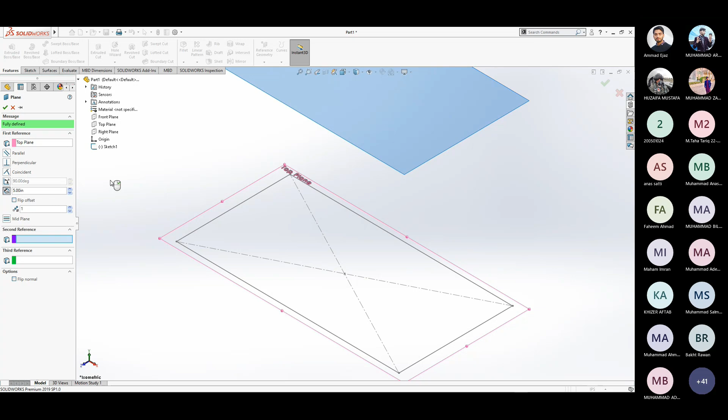With my cursor, you can see a mouse button with the right click arrow. You can select it or go to the left side and select OK. Now we have created two planes. To fit the geometry on your screen, just select zoom to fit.

Select the top plane, select the plane we just created, and start a new sketch. To make this plane parallel to our screen, go to the view orientation and select normal to. Create a new sketch. Let's say I want to go with a polygon of 6 sides. Select the center point and draw its radius. Now we have two geometries.

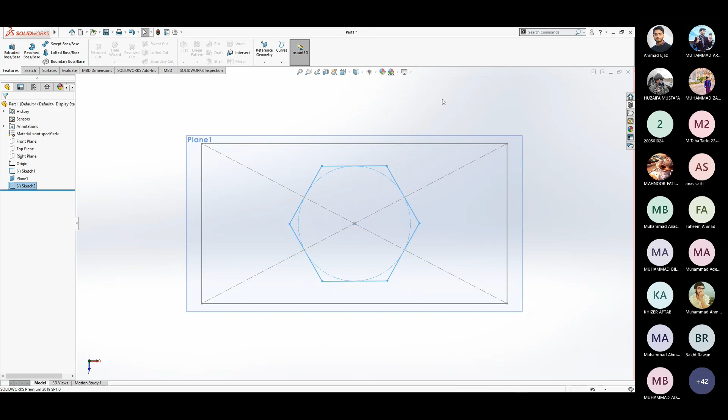Exit this sketch, go to the view orientations and select isometric view. Go to the boundary boss/base feature and select both geometries. We have selected one geometry and the second one. You can see we are creating the same feature just like lofted boss/base.

Now, the point to be noticed here: we got another point, which is a green point. This point is showing the direction of our geometry. This point of our rectangle will be merging with this point of our polygon. I want this point to be merging with this point. So just change this direction and the geometry will be updated respectively.

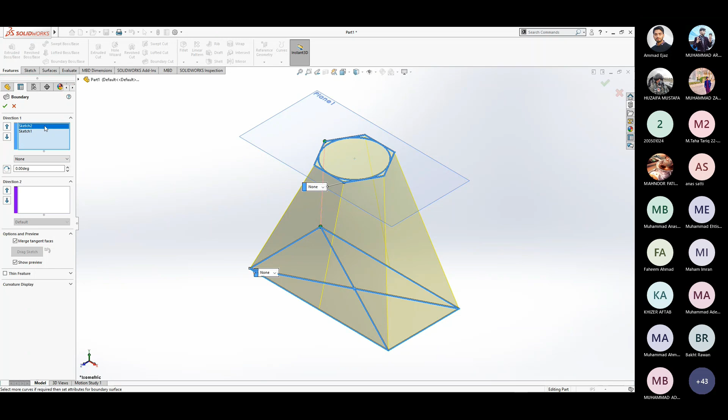Other than that, we have other features like we can make this feature tangent, direction vector, and other features. Let's select this feature. Selecting this feature, we have created the first plane normal to. We have created this geometry normal to our second sketch. To increase this sketch tangent length, we can increase this length or change its direction respectively.

These are some extra features that are not available in lofted boss/base. That was the key difference between both features. Coming to today's session, let's release this feature, or you can minimize it for later use. Go to the new file.

So far we have worked on part files. We have learned how to create sketches and how to convert these sketches into part files, into 3D objects. Now in this session we will be working on assembly files. What this assembly file icon means is you can merge more than one part to create an assembly. Just select this assembly and hit OK.

On starting assembly, you can see a pop-up on your screen. This pop-up is asking us to insert files. You can cancel it or insert the file you want. Let's cancel this, and let's visit the user interface of this assembly feature. On the top, you have the command bar, just like before in the part files.

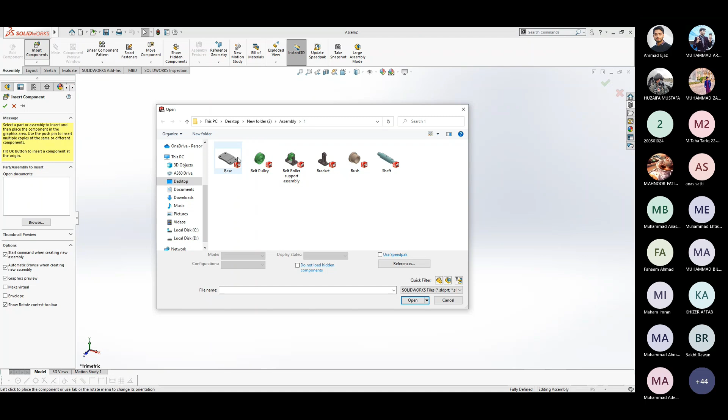Let's start the assembly. Let's click insert component. We have provided this file to you. If you go to the WhatsApp group, we have provided a zip file. If you extract it, we have two folders in it, 1 and 2. Let's go to the first folder and select base. Select the base and select open.

Now you can see my cursor is holding the object. If I want to fix this object on the plane, just select OK. Now we have successfully imported one component. If you go to the features, you can see all the hierarchy of the object is visible over here. If you want to edit some features of it, you can just click on it and edit part.

For editing this inside an assembly, you need to save it. Let's save it in your favorite directory. Let's call it assembly1. Now it's asking that your part file is an older version file. If you save it, it will not be able to be opened in the previous version. Let's go with save. Now you can see we are inside the editing feature.

We can change any sketch. We can change any features. This is just like a part file. You can see all the features on your drive. Let's exit this sketch. This is the edit component feature. Go to the view orientation and select isometric.

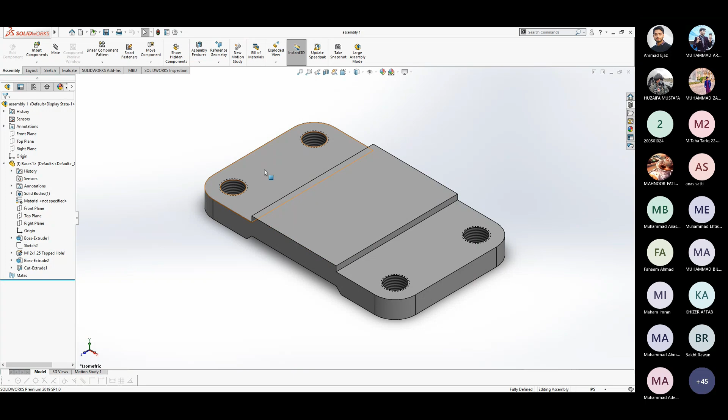Now we have one part, but we need other parts for the assembly. Go to insert components, and here you can see the preview of our other components. To make these icons bigger, just go to the right side and select large icons or extra large icons.

Now we have successfully imported this component, the base component. We want this second component, that is the bracket. Just select this component and hit open. You can see my cursor is holding the second component. Just click anywhere and the component will be imported over here.

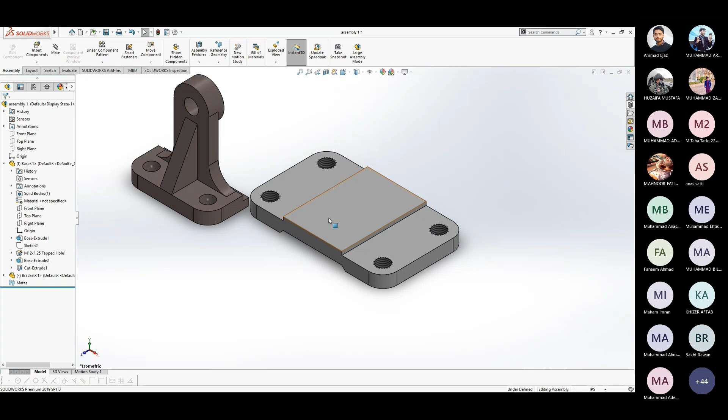Now this component is movable, but this component is fixed. When you are working in assembly, SolidWorks identifies the first component as the main component or the parent component and makes this component a fixed component. You can move this component by right-clicking and selecting float. As you can see, this component is floating right now, and you can move it. If you want to fix it, just right-click and then fix it.

Okay. We want this component to be sitting on this part over here. For that purpose, let's select this plane, this face, and rotate it, so you can see the bottom part of this second component. Select both components. As you can see, we have a pop-up over here. It is asking us to define some constraints.

Just like relations in sketches, we have mates in assemblies. The first one is called a coincident relation. Second is parallel, third is perpendicular, and the fourth is lock components. These are the primary mates, and the others are advanced features. You can also access this bar from this option. Just select mate and select the respective faces.

As you can see, our component is automatically dragged to this respective position. If you want to change its orientation, you can flip it from here. Currently, we don't need to flip it, so just select OK.

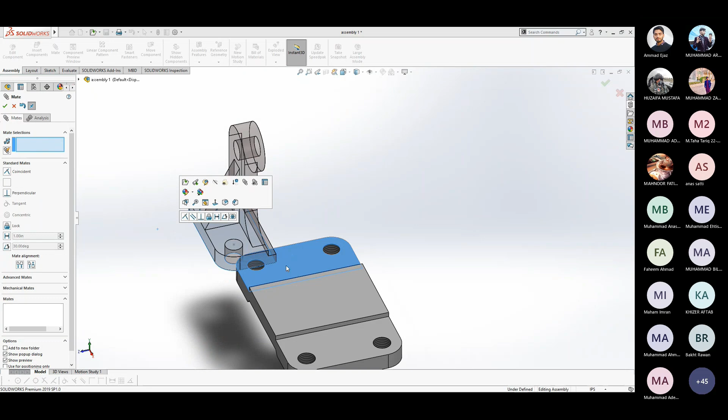Now we need to rotate this component about this plane. You can simply select this face and rotate it, so you can see this side of the bracket. Select both of these faces and select coincident. Now you can see it is making these components coincident. But what I want is this part of the bracket facing in this direction.

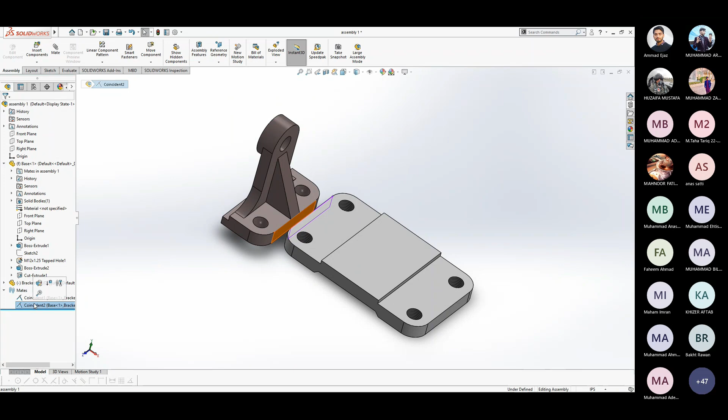For that purpose, go to the mates. In your feature manager, under your assembly file, you can see the mates that we have already created. The first one was coincident and the second was coincident. If you want to flip it, just go to edit feature and select mate alignment. Hit OK.

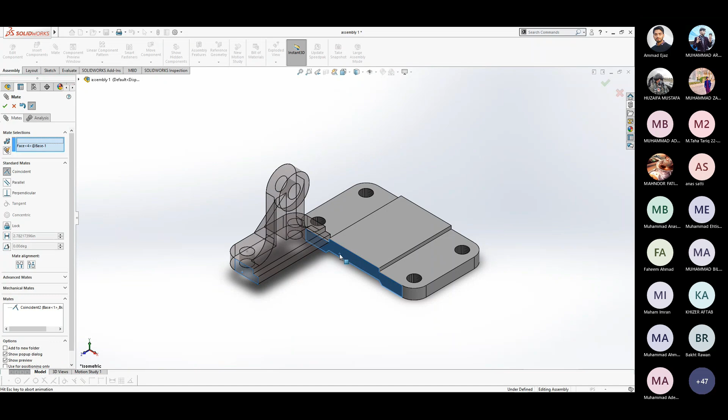Next, we want this face to be coincident with this face. Select the first face and then the second face. As you can see, both components are perfectly aligned with each other. Now we want this part to be mirrored over this side. We can copy this component and do the same steps again, but there's a smart feature for that called the mirror feature.

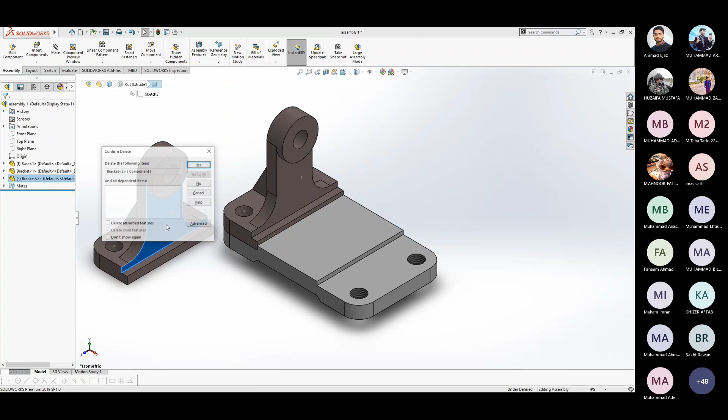In order to copy a component, you can select insert component and add another component. Other than that, you can just hold the control key on your keyboard and drag a component. You will get another copy of the component. For this operation, we are going to mirror this component. Just select the component, go to the linear component pattern, and in the drop down you can see mirror components.

For this mirror component, we have two primary options. It is asking for the mirror plane, the plane about which you want to mirror this object. As you can see, we can't select a plane right now because the view is occupied by the mirror components feature. For that purpose, go to the feature tree, select the drop down, and select the respective plane. For our assembly, it is the right plane.

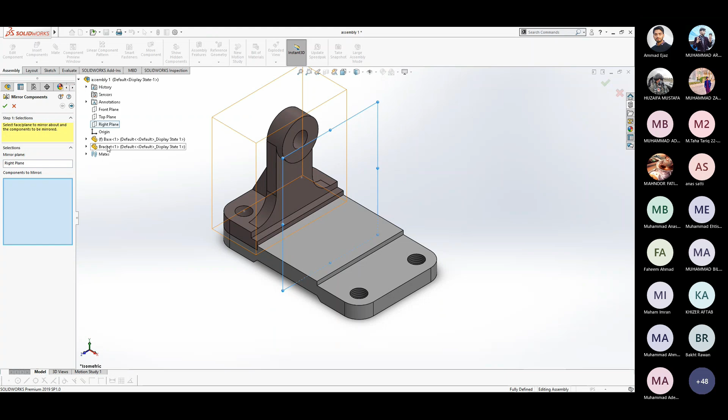Select the right plane, and now it's asking for the components to mirror. We have this component to mirror. Select the component, and go to the next. It is already showing a preview of how it will look after you mirror it. Hit OK, and you have another copy of the component.

As I described earlier, every feature in SolidWorks is a non-destructive process. If you add anything to this component, the same feature will be applied to the other. If I move this component, the movement will be applied to the respective other components.

Let's select insert component and insert our third component. For the third component, I want to select the shaft. Double click on the shaft and you will have your shaft in your assembly. Select anywhere on your screen.

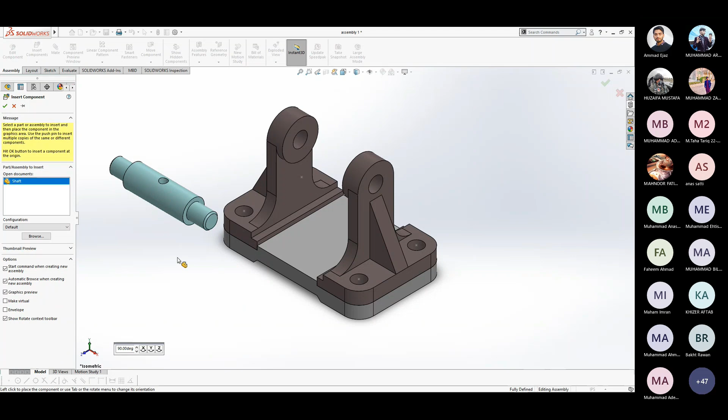Now, as you can see, we want this shaft to be inserted into these holes. For that purpose, just select the circumference of the shaft and the circumference of the hole. By selecting these two faces, you can see we have a pop-up of mates. For this operation, we want concentric. What's concentric? Concentric will combine two circles and make their center points coincident. Select it, and your part will fly to the respective position.

Now, as you can see, all other components are fully defined. Only this component is underdefined. This component can't move anywhere else, but it is free to move in this direction. To make this component fixed on this bracket, we need to apply another mate. This mate is called width mate. What will this width mate do? For better visualization, go to the front plane.

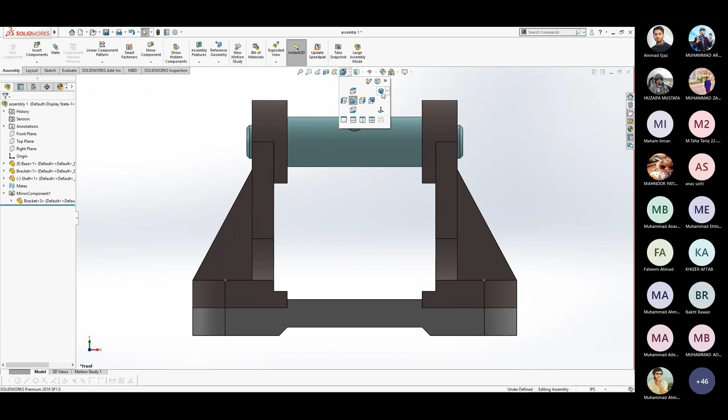We want this pin to be equally distanced from both sides. For that purpose, go to the isometric view. Drag this component outside of the assembly file. Now, select the respective component. For this operation, select the first face, hold down your control key, and select the second face. Rotate it, select the third face, and similarly select the fourth face. When you have selected four faces, SolidWorks automatically detects that you are trying to apply a width mate. Just select the width mate, and SolidWorks will do the rest of the job for you.

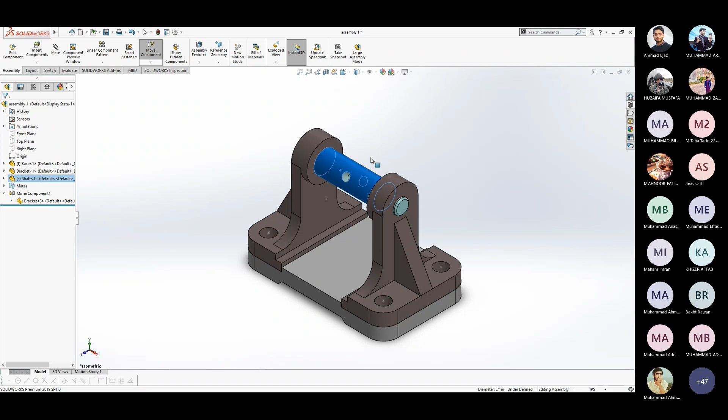Go to the isometric view. Now we have created this assembly. This assembly is complete except for one component. As you can see, this pin is able to rotate along the axis. We want to insert another component. Just go to insert components and select pulley. Here you have your pulley with your cursor. Now we want this pulley to be concentric with this pin. Similarly, select the inner face and select the outer face.

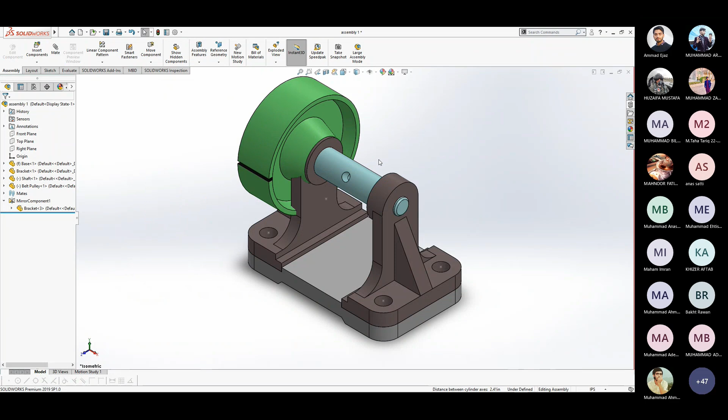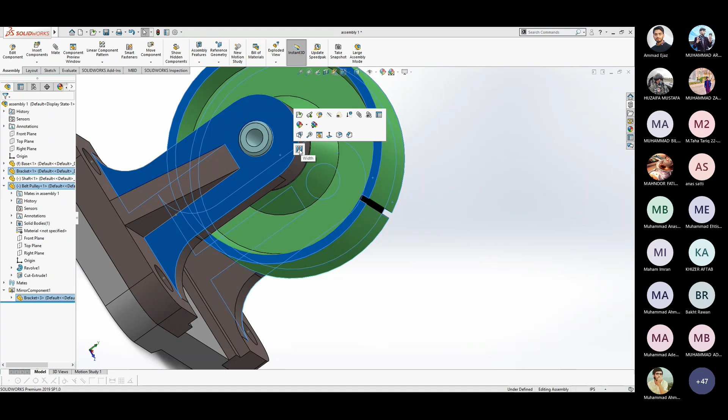Select the coincident relation. As you can see, our pulley is coincident with the pin, but just like with the pin, we want this pulley to be in the center of these faces. For that purpose, we can select another feature that is called symmetrical. Select your part. When you look into the part, you can see different faces. You can also use the width feature for this operation. Select the first face, second face, similarly rotate it, and select the third face and fourth face. You can see we have width selection with your cursor. Select it, and we have our pulley fixed in position.

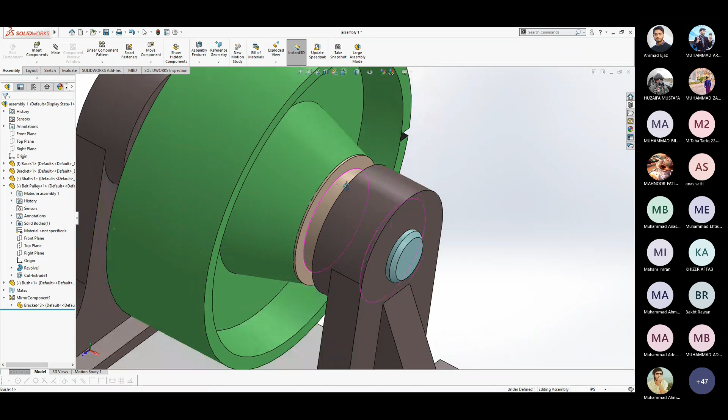We have created our assembly. We just need to insert one component over here. Select insert component and select bushes. Here are the bushes. To insert this bushing along the pin, we select the outer face of the bushing and the face of the pulley. We have a coincident relation over here. Now we want this face to be in line with this face. Just select both faces, and we have suggestions of parallel, perpendicular, or coincident. For this operation we want the coincident relation. Just select this.

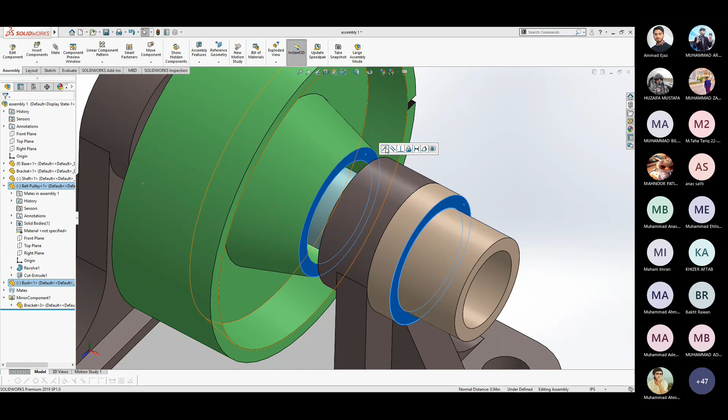We also need this bushing on the other side. We can go to mirror components. But since we already have a mirror, for the sake of simplicity of our feature manager, you can edit this feature. Just select edit feature, and under components to mirror, select the bushing. If you go next, you can see we have our bushing on the other side. This is our assembly completed. I guess it's a part for furniture.

If you want to insert general components like bolts, nuts, bearings, or gears, you don't need to draw these components on your own. We have the toolbox provided with SolidWorks. This toolbox includes all the most commonly used components. If you want the inch system, you can select inches. Currently, we are working in the metric system, so select ANSI metric.

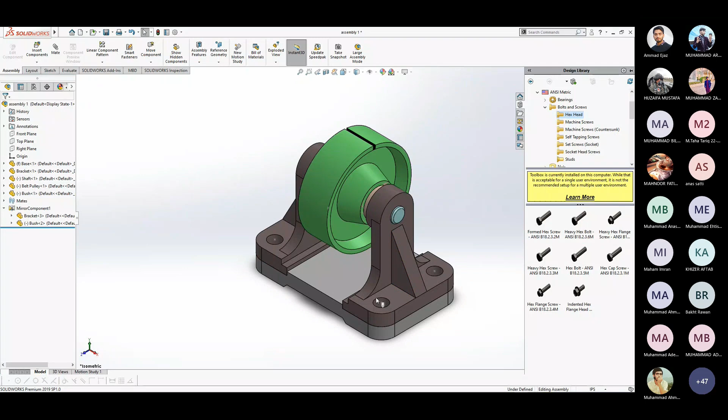These are different kinds of bolts you can install. To insert a component, just hold a component and drag it into your feature tree, into your assembly. If you hover over your respective hole, it will create a suggestion for you. Now, as you can see, I want to insert a bolt onto this hole. It is already creating a suggestion for me. If I want to select this feature, this hole, it will go respectively. Let's select this hole and release your left mouse button.

Now it is asking for different options, like what's the size of your bolt and what other features you want. Let's say we want to select the size. You can see under size you have different options like M5, M6, and M10. This is the diameter of your bolt. If you go to the manufacturer and ask for an M12 bolt, you will find exactly this bolt.

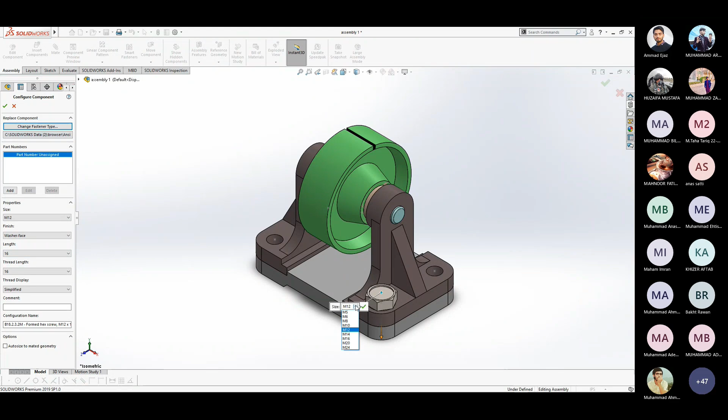After the size, we have the length feature. You can see under this length operation, we have different length sizes. You can also select this option from over here. Select your appropriate length, select your appropriate size, and you are good to go. If we select OK, it will create a bolt over here.

Now it's asking if you want to insert other bolts. You can insert them respectively. Let's say I want to insert a bolt over here, a bolt over here, rotate your geometry, and a bolt over here.

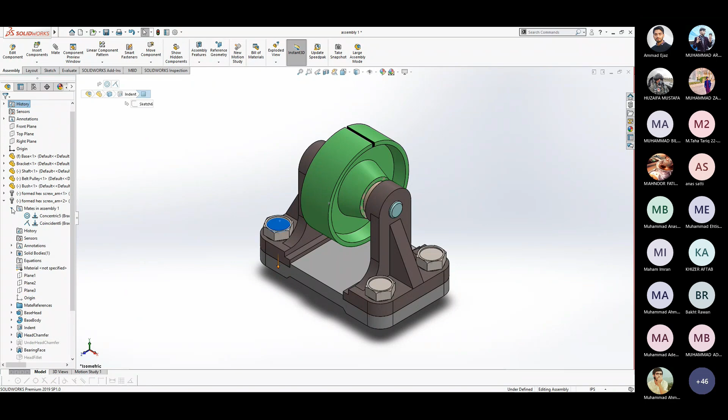If you select a bolt, go to the feature manager and under the mates in the assembly, you can see SolidWorks has already created the respective mates for us. For this operation, we need a coincident mate and a concentric mate. And this was our first example for today.

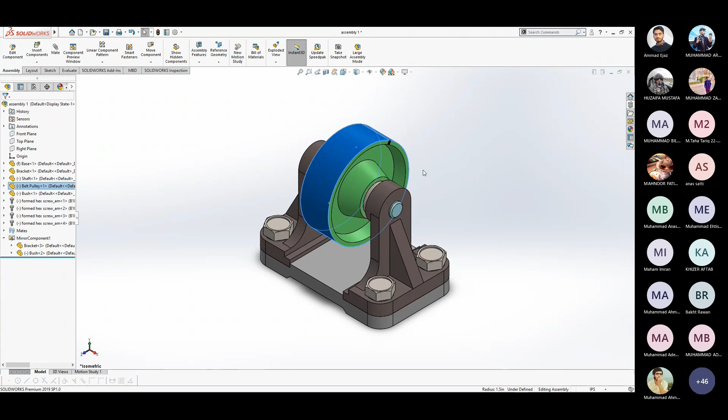You can simply save this file: go to File, Save As. It's asking if you want to rebuild your assembly. You can go without rebuilding or rebuild. We have already saved our file. Just double click, and it's asking if you want to replace it. Just hit yes. Now we have completed our first assembly. This assembly is fully working just the way it is meant to be. Minimize the assembly and we will move to the second part.

Go to New File, select Assembly. It's asking if you want to browse other components. Just hit browse, go to the directory. As you can see, the preview is available with the thumbnail, but it's a little small. Go to the right side and select extra large icons. We have already provided this assembly file and parts files if you want to practice along the way.

Just select your first part. I want to select this main bracket. Select this main bracket and double click. Now it's asking for the location where you want to position this part. You can move this part, and you can also rotate this component. For this operation, I don't want to rotate it, so just hit OK.

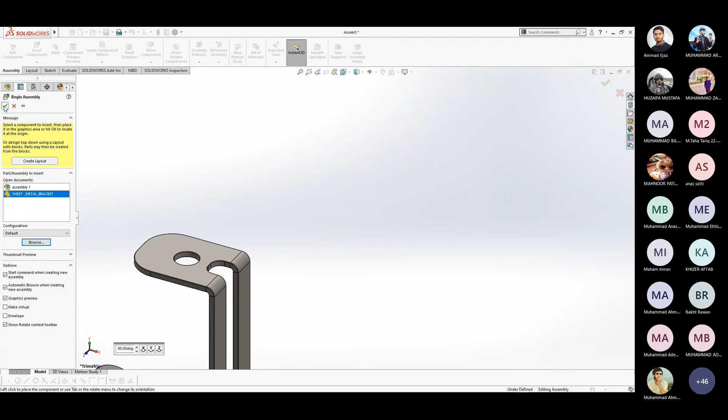In the feature manager, you can see a cap over here. This cap means this part is only for educational purposes. If you want to use this for commercial purposes, it's not allowed by the software. Okay, we have imported our first part.

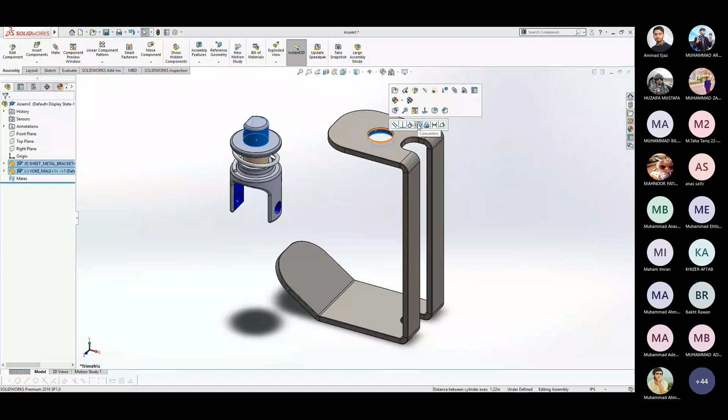For the second component, go to Insert Components, browse, and for the second component, I want to insert this one. Double click, and here you have your file. I want this part to be in a concentric relation with this hole. Just select your first face, hold your Control key, and select your second face. Concentric relation. And your part will fly to the respective position.

As you can guess, the first part is fixed and the other parts are floating. Our main aim is to fully define every component. We have motion in the y-axis. To limit this y-axis motion, we will select this face, rotate it, select this face, and select the coincident relation. As you can see, this part is rotating, but it's not able to move in the y-axis.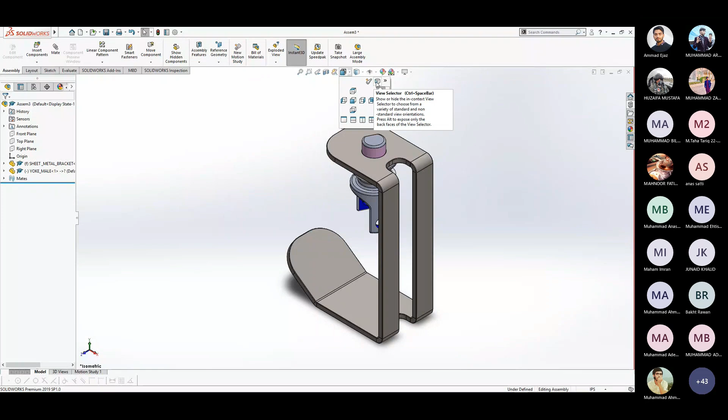To view it from the other side, go to the view orientation and select the view selector. For this purpose, I want to select this side. Okay, we are ready to insert other components. Hit Insert Components, browse, and select the spider hinge. Double click on the component to insert it.

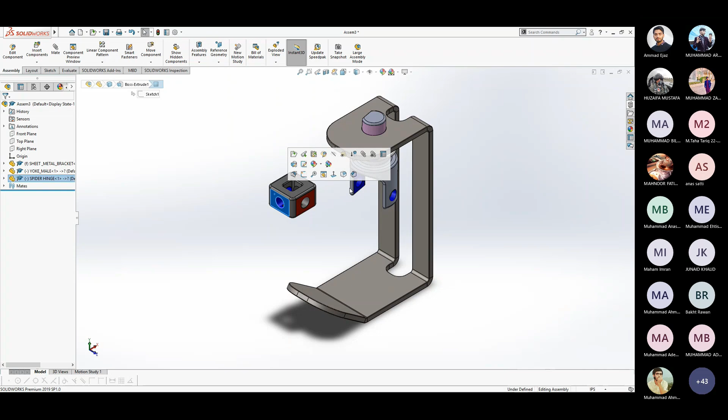Okay, for this operation, each component is colored in the respective manner, in the respective color. Like a blue color will go with the blue color, a red color will go with the red color. As you can see, blue color, I will select the first blue color and select the second blue color. It's asking for which kind of relation you want. We want a coincident relation. The part will fly to the respective position.

Okay, now we have limited this part to be coincident with this male yoke. We want this circle to be coincident with this circle. Select both circles and select coincident relation. Here we have our assembly with 3 components. You can check, make sure your assembly is working the way it's meant to be.

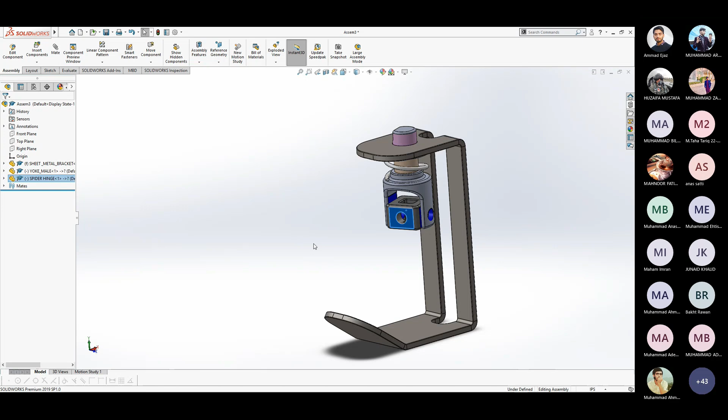Now select insert component to insert another part. Go to browse feature and select yoke female. It's saying that the font being used by the owner is not available in your system. So select use the temporary replacement font. Here's your other component.

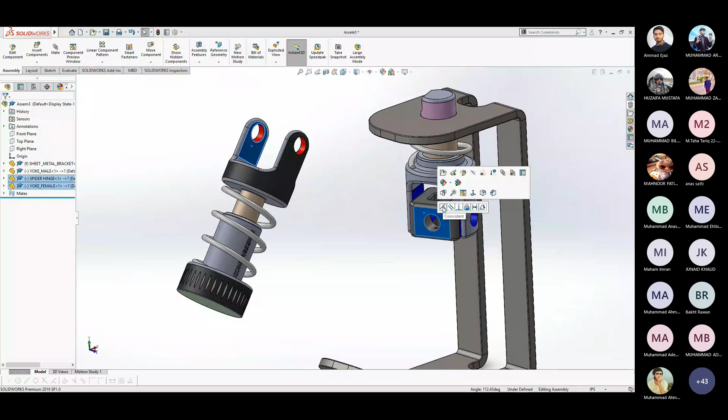Okay. As you can see, this part is also colored in the respective color. Select red color and select red color on this part. Select both faces and select coincident relation. Similarly, we want this face to be concentric with this hole. Select both holes and select concentric relation.

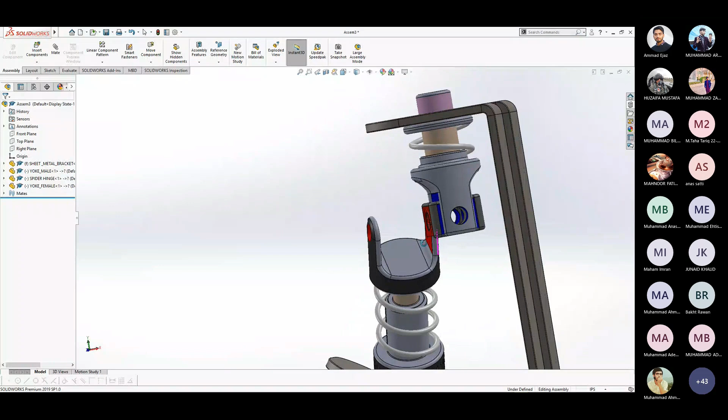As you can see, we want this face to be coincident with this side. We want this part to be in the center of this part. For that purpose, select the last created coincident relation and hit edit feature. Okay. Here you can see both selected faces. If you select the first face, it will highlight which face it is. We want to delete this face. Go to the other side and select the other face. Hit OK.

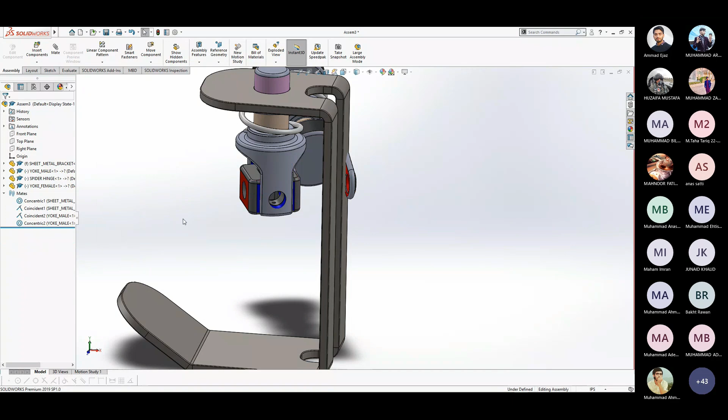It's not working the way it's meant to be. So just select the last two features and hit delete. Now select first face and select the second face. Hit coincident. Now select inner face and this inner face and select coincident relation. Now you can see our assembly is working properly.

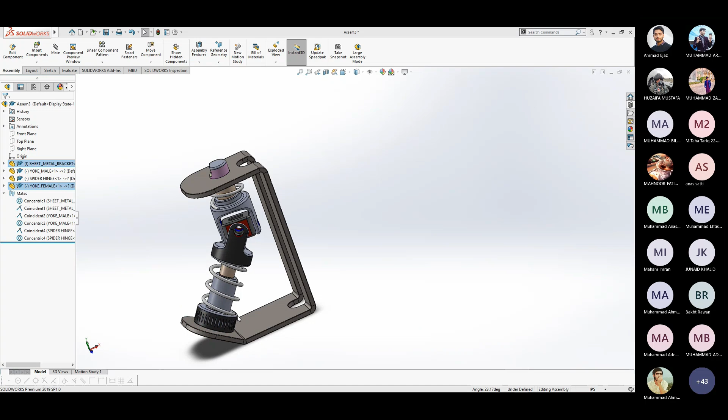Now we want to fix this plane, this face, this body to its respective position. For that purpose, select this face and select this face and hit parallel relation. What it will do, it will make both faces parallel. Now, as you can see, our assembly is working properly. Now we can insert other components.

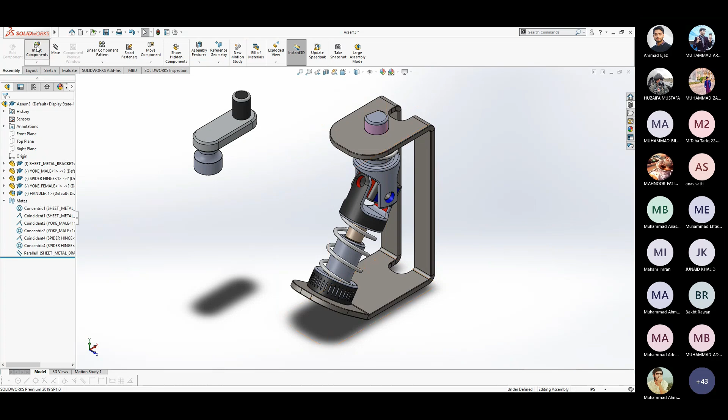Select the insert component, go to the browse feature, and select top handle. We have our component over here. Again, go to the insert components, go to the browse feature, and select handle. We want this handle to be concentric with this face. Just select both faces and select concentric relation.

Now this body is fixed, but it's able to move up and down. To limit its movement, select this face and rotate it until you can see the bottom face. Select both faces and hit coincident relation. Now this part is fixed in the vertical axis, and its position is also fixed.

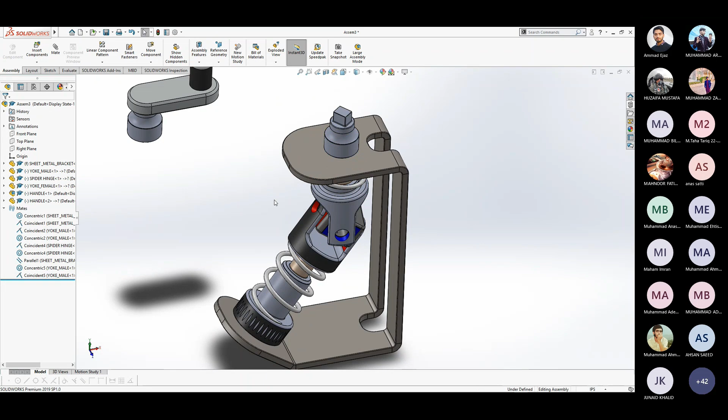But this component is meant to move this part and this part. Like if we rotate the top handle, it should rotate the assembly below. To add that feature, go to the display style and hit hidden line visible. You can see in this part we have, for better visualization, select the component and select component preview window. What it will do, it will just temporarily open this component.

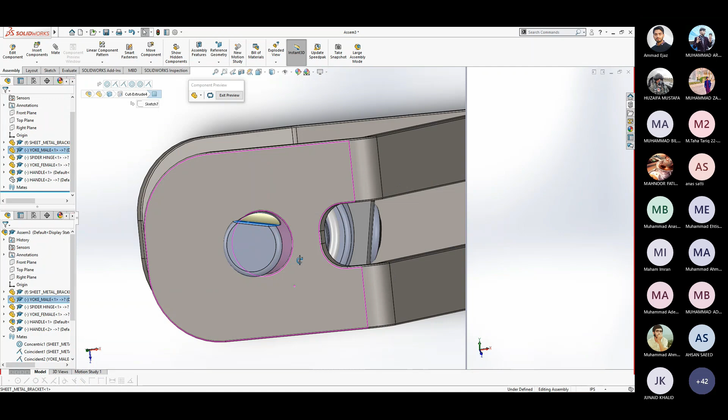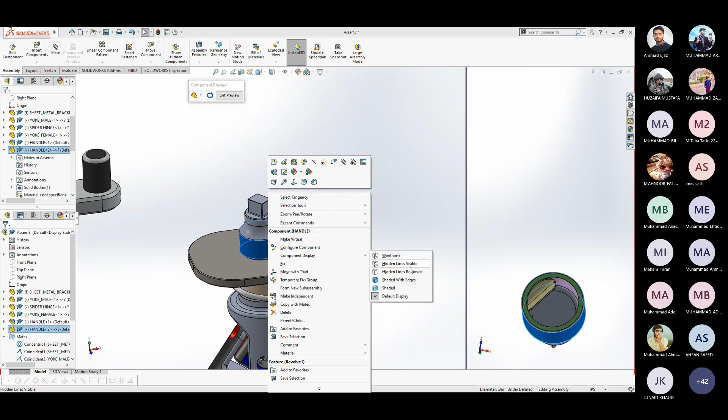What I'm trying to do is I want this face to be coincident with this face over here. For that purpose, you can go to the component display style and select this feature. Select this face and select this face over here and hit coincident relation. Exit preview, go to the isometric view.

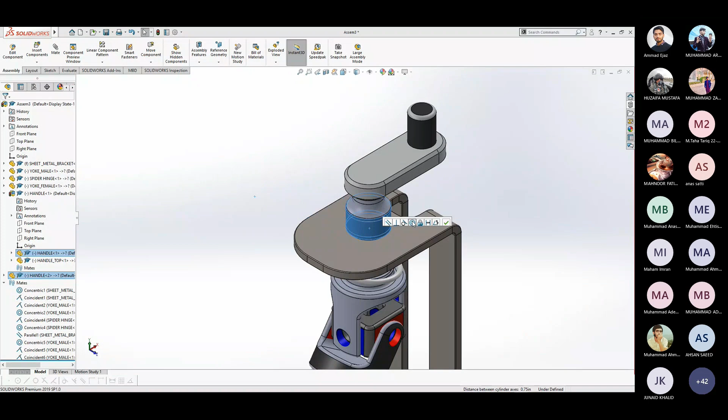You can change the display style of this part to the same as the other. Now, if I rotate the top component, it will rotate the bottom components too. Now we want this component to be sitting on the top of the center. For that operation, just select both faces and select concentric relation. This component is able to move up and down, but it's also not moving the other components.

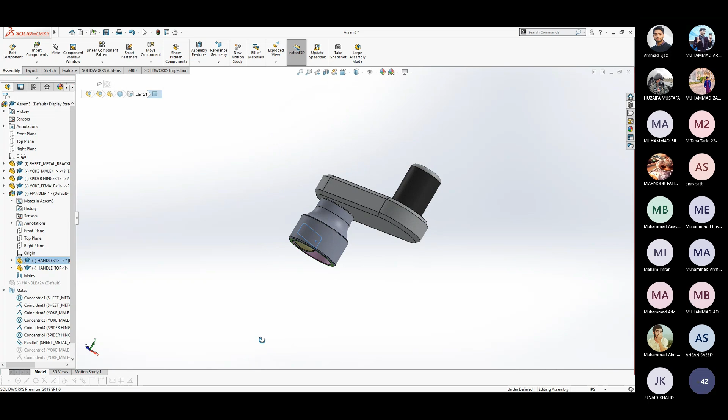For that purpose, we have accidentally inserted a wrong file. So just hit this file and select suppress. This part was supposed to be sitting on the top of it. So select this inside face and select this face and hit coincident relation. Now we want these two faces to be concentric. Select both faces and select concentric relation.

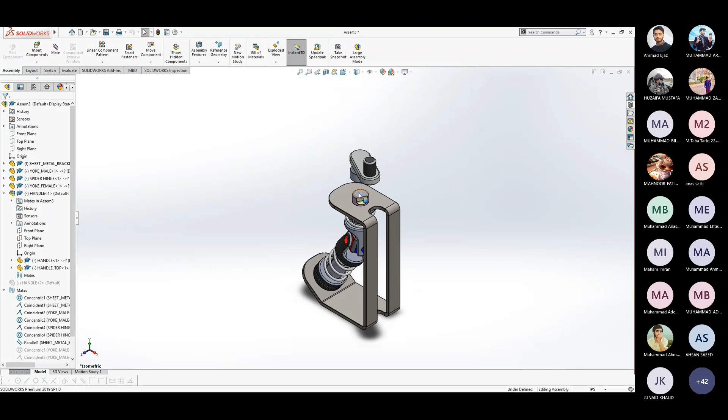We want this plane to be sitting on this face over here. Select both components and select coincident relation. As you can see, our geometry is overdefined right now. This means two mates are contradicting with each other. Those mates are the following. Just select both mates and hit delete.

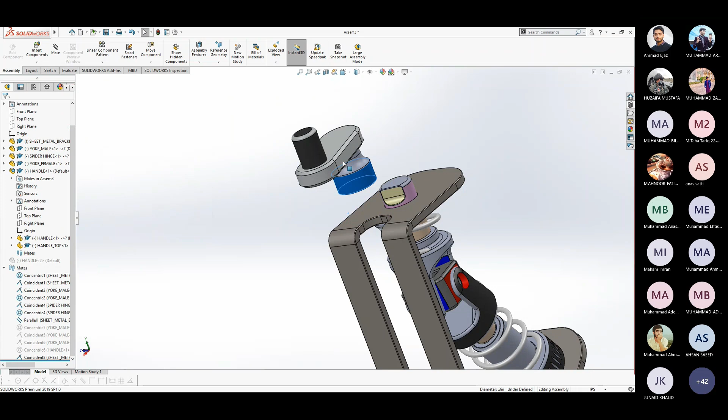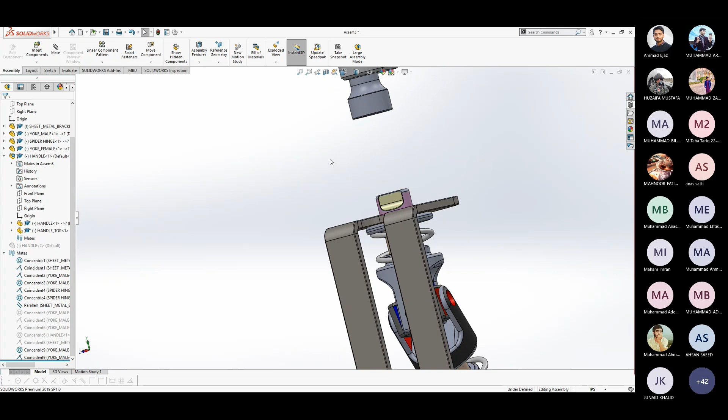For this operation, I want to suppress this operation temporarily. Select this face and select the other face and hit concentric relation. Now we want this face to be coincident with this face. Select both faces and hit coincident relation. Now, as you can see, our assembly is defined and it's working the way it's meant to be.

Now, all we need to do is to make this component coincident with this component. For this operation, I want to use another command. Just hold your Alt key and select your component. Now you can see our component is asking for another relation. Hold your middle mouse button and rotate it. Now move it to the top face, and as you can see, it is already creating a coincident relation.

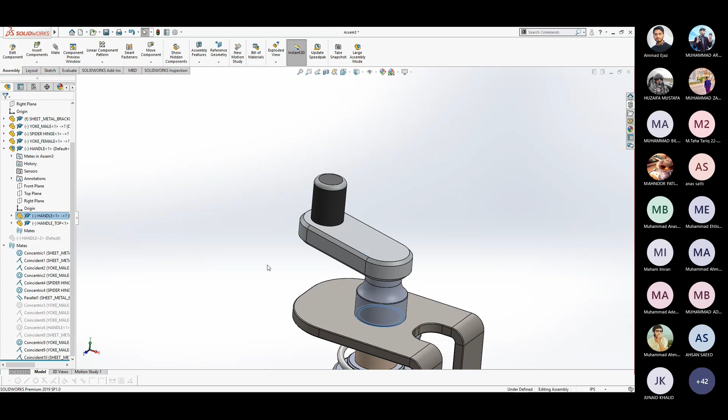This is a quick way to add respective mates. It's asking if you want to add a parallel mate and other mates. We want to add a coincident relation and hit OK. Now you can see our geometry is ready and is working properly. By the way, this is our universal joint, which is used to transfer motion between two shafts that are not parallel to each other.

You can also save this file. Go to Save Component, Save All, Rebuild and Save Components, and select your assembly name. Okay, we have successfully created two files. We are short on time, so let's be quick and let's visit advanced features over here.

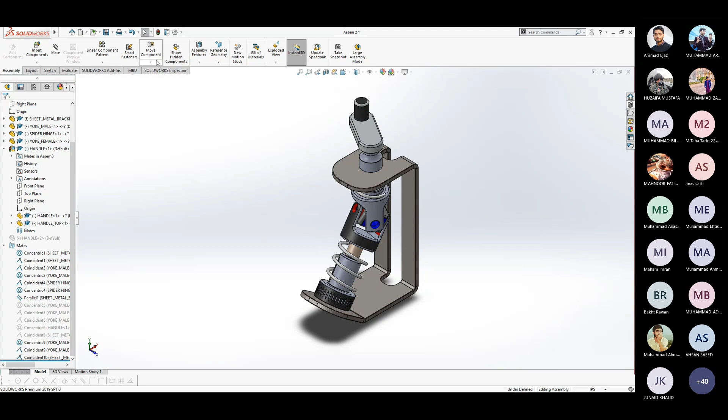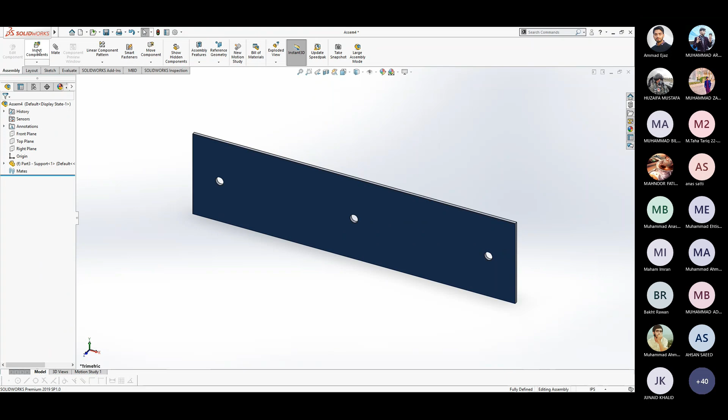Let's minimize this feature. Go to the new file and go to the assembly. Go to browse. Go to your directory. For this operation, my directory is the third folder. Select your first part. For this operation, I want to select part 3 support. Just insert this part. Again, go to insert components, go to browse, and select your pulley.

It's asking for some relation. Just hit OK, and as you can see, this component is fixed and this component is floating. I want this component to be concentric with this hole. Select both components and select concentric relation. I also want this component to be coincident with this component. Select both faces and select coincident relation. Go to the isometric view

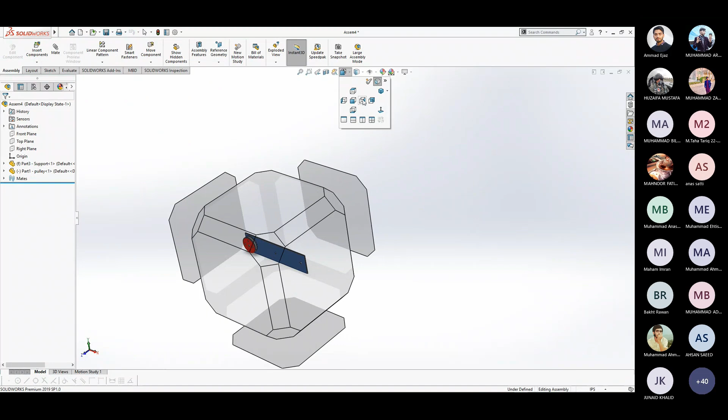for better visualization. Again, go to insert components, go to browse, and select part 4 shaft. We want three copies of this shaft. Select this component, hold your control key, and make another copy. To make another copy, hold your key and drag your component. It will create 3 copies for you. We want this component to be concentric with this hole. Select both components, those faces, and select concentric relation.

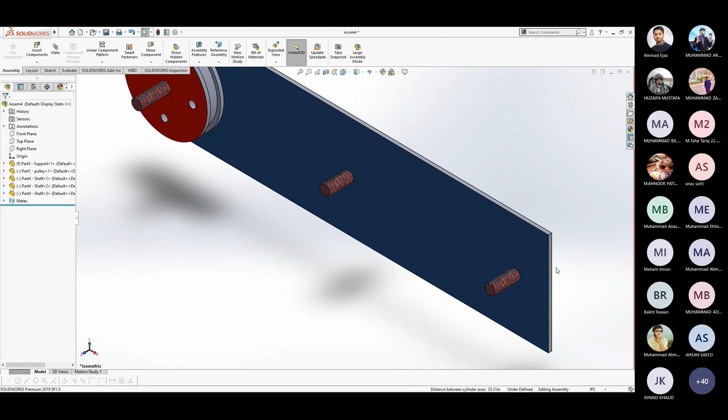Again, select both components. For this operation, I want to use a quick command. Again, hold your Alt key and drag your component. As you can see, it is already creating a concentric relation for me. Again, select both faces and select concentric relation. As you can see, these shafts are able to move on the x-axis.

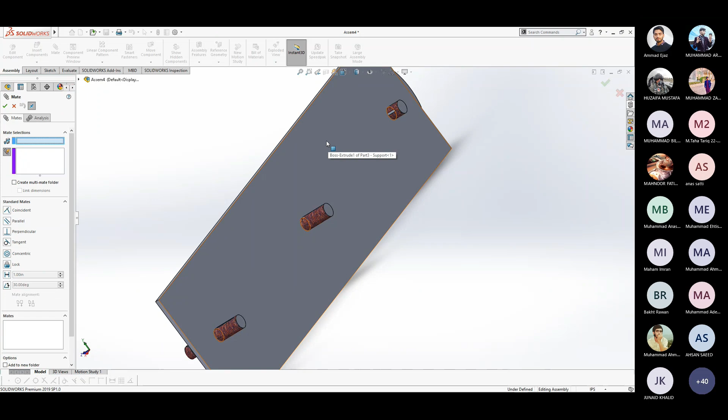To limit this movement, go to the mates and hit multiple mates mode. It's asking for the parent object. Our parent object is this face. Select this face, and it's asking for the child parts. Select the respective faces. It will move both faces to the respective position. Our current position is coincident, and it will make coincident relations. Select the other faces and hit OK.

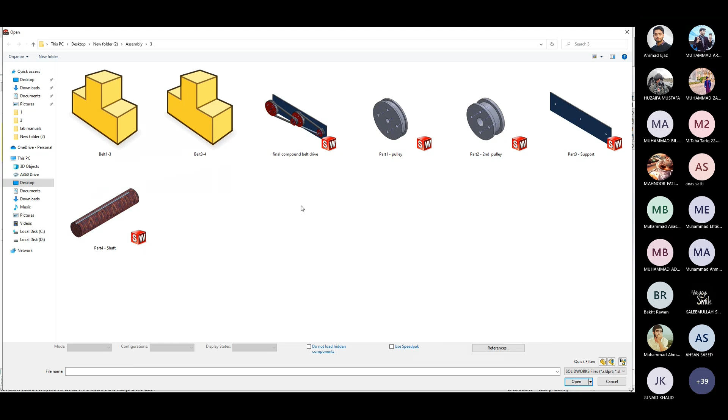For better visualization, go to the isometric view. Close this command. Again, go to insert components. Go to browse and select your second part. I also want another copy of this component. Hold down your control key and add another component. Similarly, hold down your Alt key and move this component towards the shaft. It will add a concentric relation for you.

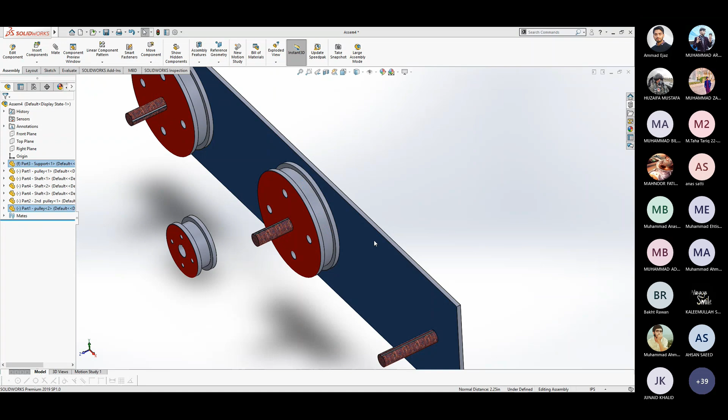We want this component to be sitting on this face. Select both faces and select coincident relation. Similarly, select this face, hold your Alt key, and move this component. It will add a concentric relation.

Okay, we are a little short on time, and let's add this mate. What we are trying to do, we want to control the movement rotation of this component by this component. For this operation, we want a pulley made. Go to the assembly features and select belt and chain.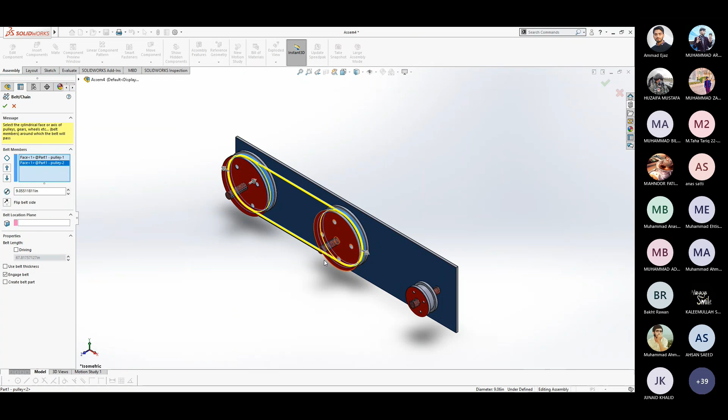Now it's asking for two faces. For this operation, select the first face and select the second face. It's already creating a preview of a belt for us. Just select OK, and it will do the job. Now, if you rotate the first component, it will rotate the other component too.

You can save this assembly to rebuild and save the document and save as assembly 3. That's all from our today's session.

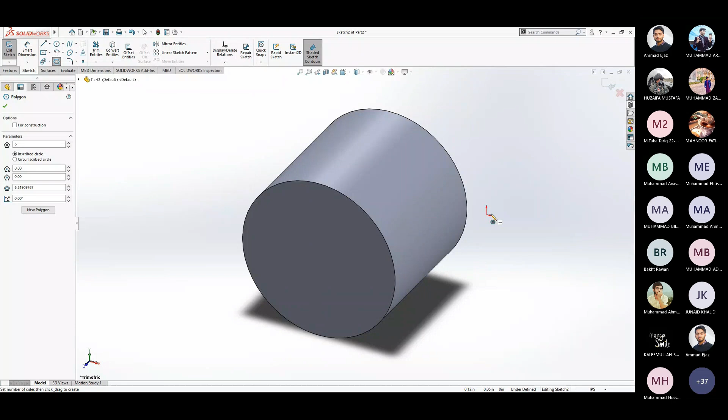Go to the extrude feature, and here you can see we have another feature which is called merge results. If we uncheck this option, it will extrude for you, but it will create another body for you. What are bodies in SolidWorks? It acts like two different components. If we uncheck this merge option and select OK, as you can see in your feature manager, we have two different bodies,

and these faces are contradicting with each other. If we want to merge these bodies, you can go to edit feature and simply select merge results. Now you can see we have only one body over here. There's another way to do this operation.

Just uncheck these merge results, and if you go to the right side, search commands and type in merge and type in combine. If you select this, it will start the operation, but if you go to the eye icon, it will show where this operation is lying. As you can see, here's the combine operation. It's asking for bodies to combine.

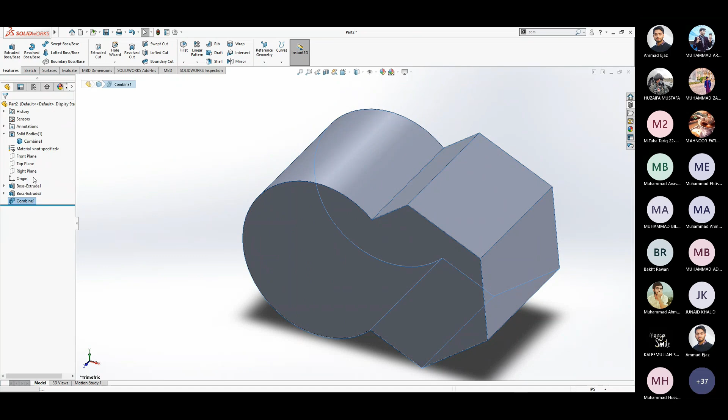There are other options for that. The first is add. It will simply add both bodies. We can see we have only one body over here. Another is subtract. It will subtract the other body from the main body. You can hit show preview. This is the preview of the part that will be created after that.

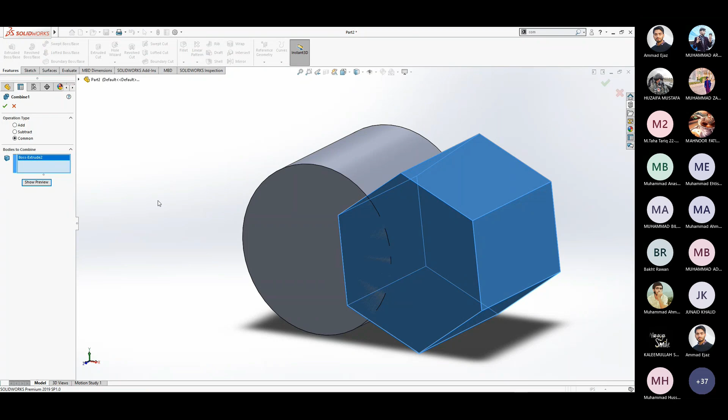You can also select common. It will eliminate the other portions, but it will create a common portion for you. As you can see, here is the common feature. So that was the combine feature, common feature, and subtract feature.

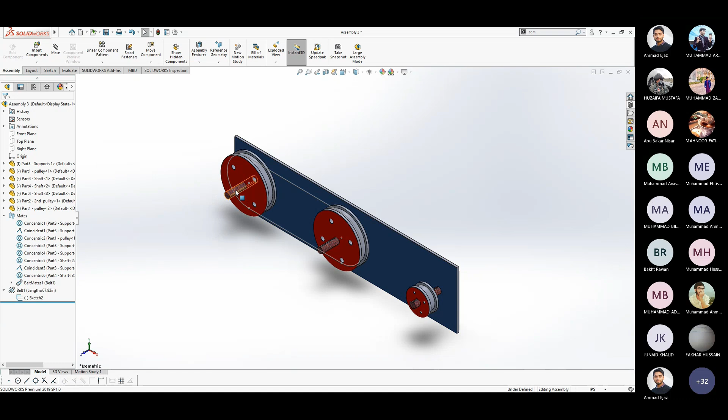Another attendee has asked for the multiple mates command. For that operation, let's delete these features. For the multiple mates command, go to the mates and select multiple mate mode. Select the parent object. Let's say I want to mate these faces to this face. Select the parent face and select the other components.

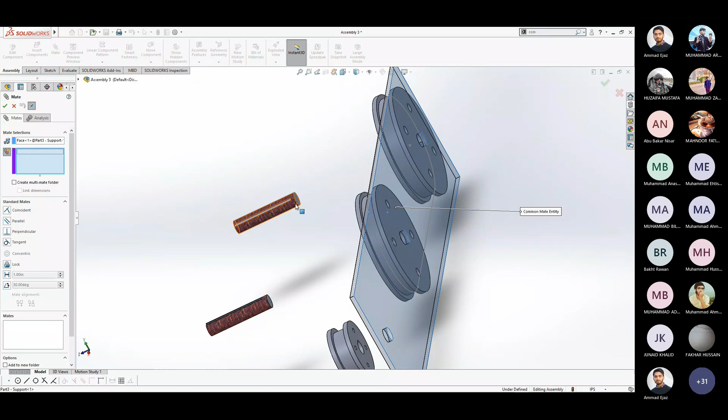As long as you are selecting the respective faces, they will fly to the respective positions. Like the other face and also this face. If you look into the feature manager, we have created three coincident relations with one command only.